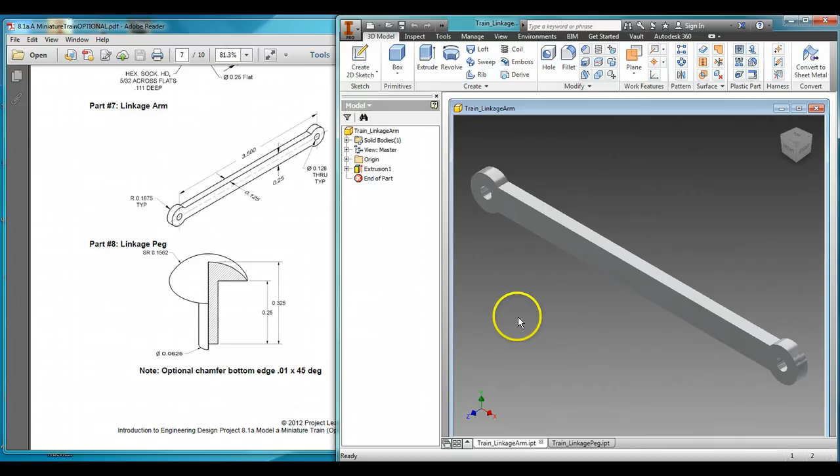Okay, we're going to be working on two videos right here for the train, Part 7 and Part 8, the linkage arm and the linkage peg. Let's go ahead, well, when you're done, your linkage arm will look like this, and your linkage peg will look like that. Let's get started with the linkage arm.

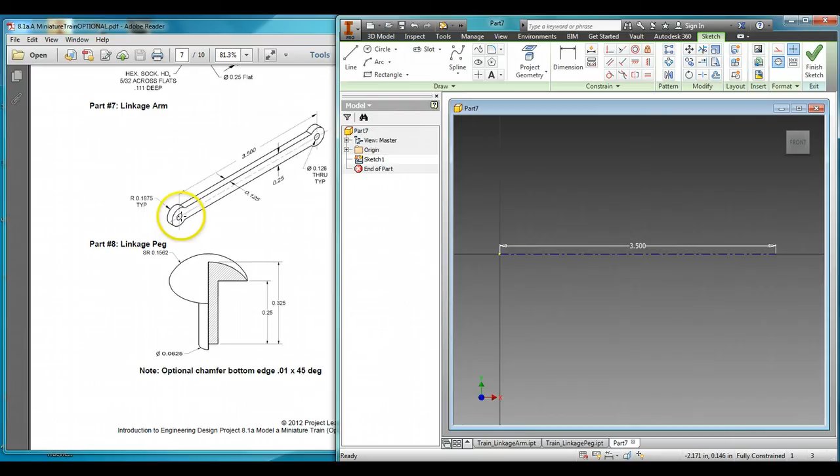I'm going to start a new part with a 2D sketch. You'll notice that this begins with a 3.5-inch center line. So line, center line, and make it 3.5 inches long. You'll next notice that there are two concentric circles on the end here, one in the middle, one on the outside. So we'll start with a circle.

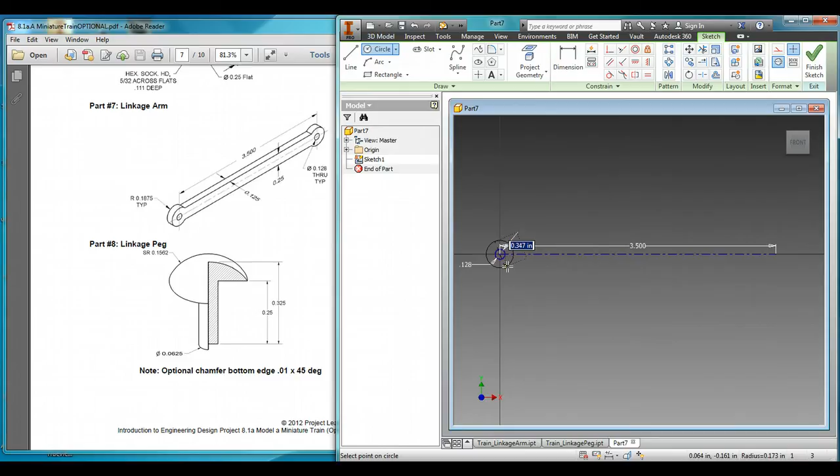You'll see it's the first circle says 0.128 typical, so that is a diameter. So we'll make 0.128 right there. Now next you'll see this gives a radius of 0.1875. So on our second circle we're going to have to put 0.1875 times 2 so we get the proper diameter. Same thing on the other end, 0.128, and then 0.1875 times 2 so we get the diameter.

So we've got our ends pretty well formed now. Next we're going to need a straight line on the top and the bottom. You can see this part is 0.25 thick. So what we're going to do, click off center line, just draw a line here, like so, another one there, and we're going to dimension this.

You can see it's 0.25 thick, so each line should be half of that to the center. So we are going to go 0.25 divided by 2. And then the same thing down here, 0.25 divided by 2.

So now that should be our part. And if we check our overall dimension, let's see, hang on, let me zoom in. I've got some problems with my geometry.

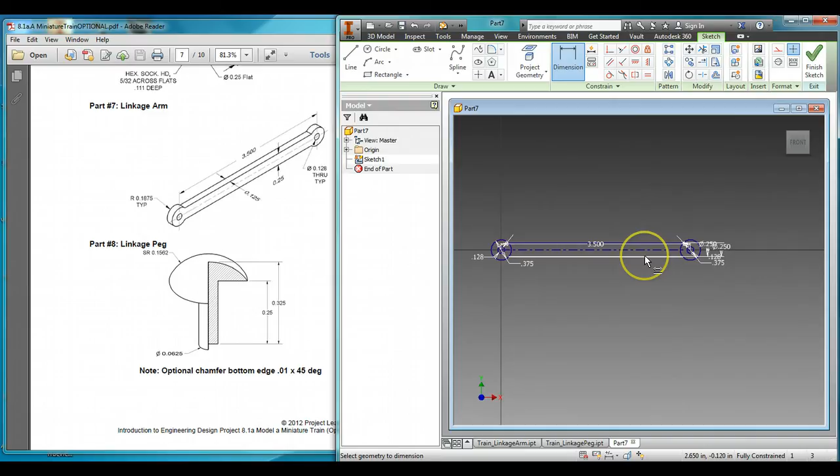From there to there, there we go, 0.25. And then there to there, 0.25. There we go. So now this piece is 0.25 total thick. It was measuring from the center line, 0.125. So this is what it should look like. It's 0.25 thick when it's all said and done.

And it intersects the circles. So let's see, our endpoints are all good. Should be ready to extrude it. Click finish.

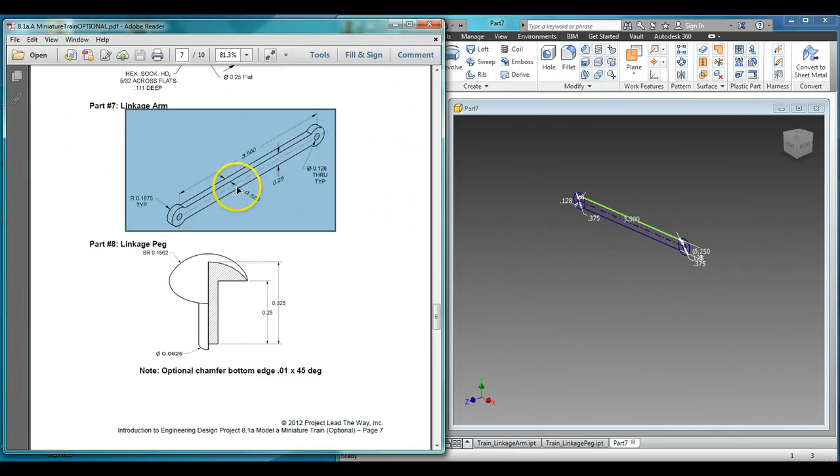And let's see, we got to find out the thickness, which is 0.125 thick right there. So zoom in, extrude, move this over, extrude that, extrude that, extrude that, and it is 0.125. So there we go. That is our finished linkage arm.

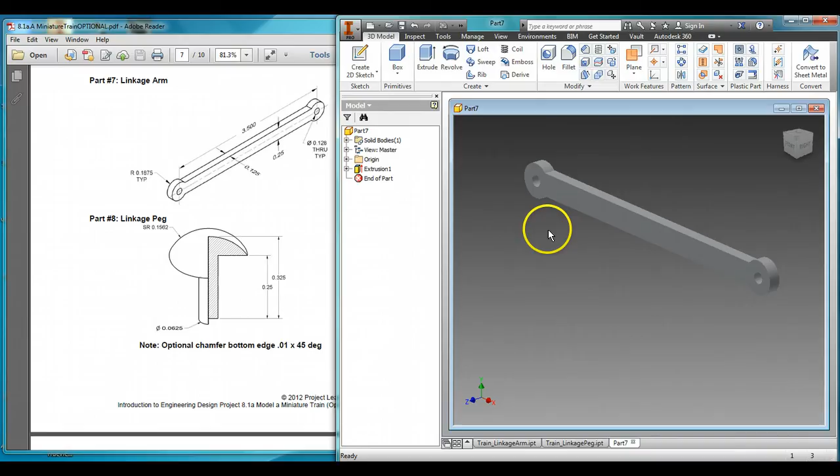You probably want to change this to some sort of metallic structure to actually match the rest of your train.

Now the next piece that we have to do is our linkage peg, and this is going to be done with a revolve feature that you've done before. So let's go ahead and start a new part. Create a 2D sketch. Start with a center line, which is 0.325 long, because that's the overall length. 0.325.

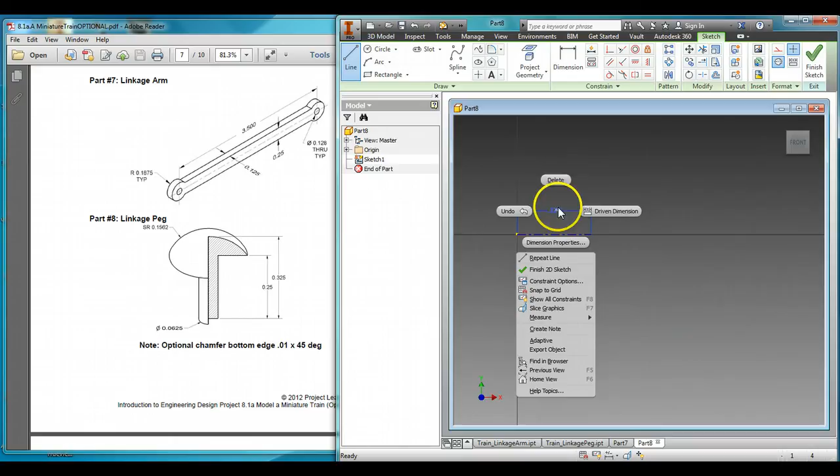Now from here, you'll see that the bottom is 0.0625 in diameter. So let me delete this so you can see a little bit better. Click off center line. We are going to put 0.0625 divided by 2, because that is the radius, and we're going from a center point.

Now you'll see that the next feature is 0.25 over, so a line, 0.25, right there. And you can see that we have a spherical radius of 0.1562. So click arc.

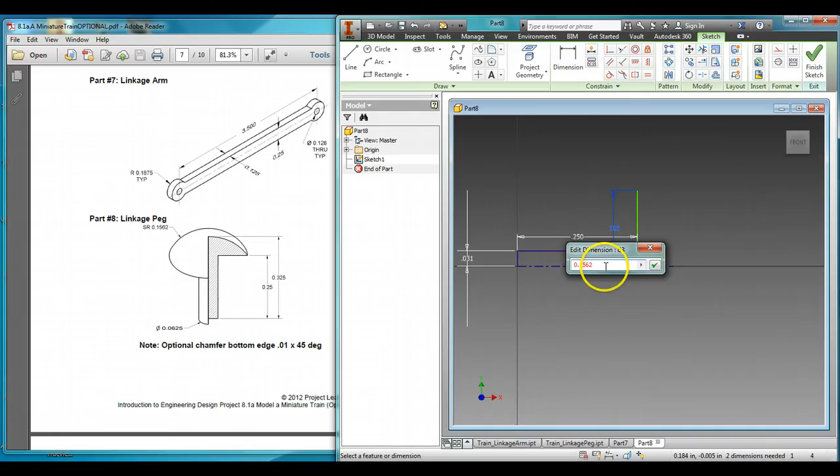Let's see, we need this diameter right there. So let's see if we can get the math right. Go up through there, and 0.1562 right there. Let's double check that. Divided by 2. 0.1562 is the spherical radius. So no, we were right before.

It is 0.1562. And then we have an arc here of 0.1562. There we go. And let's try finish sketch. Revolve it.

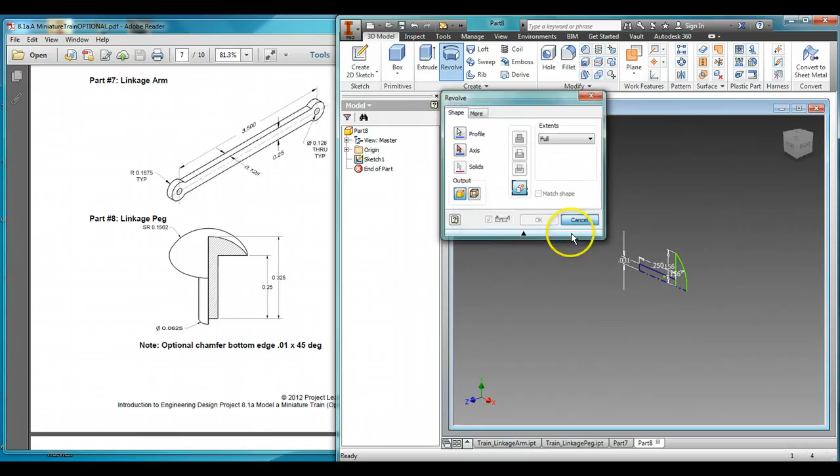Oh, I forgot to do some trimming. So let me edit that sketch. Trim that piece. Delete these. Now trim that piece. There we go. Revolve.

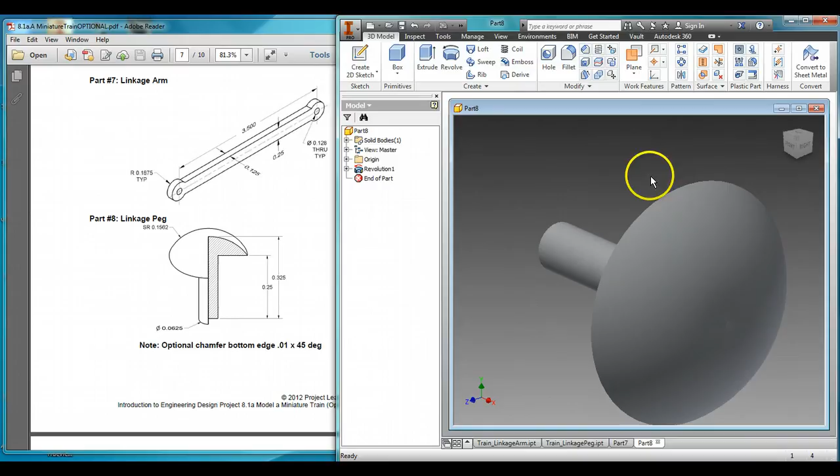And there is our linkage peg. You should probably set this to some sort of matching fun color that fits your overall train's idea that you're going to be working with.